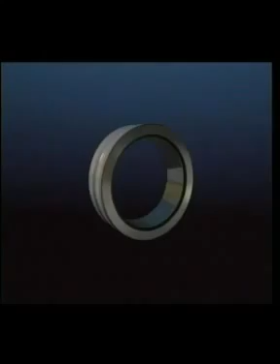The self-aligning ball bearing consists of two rows of balls secured and separated on the inner ring by the cage, and a sphered outer ring raceway.

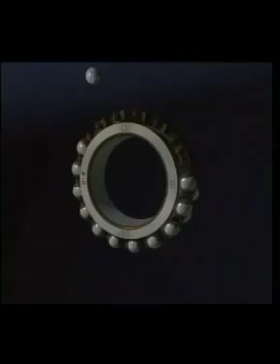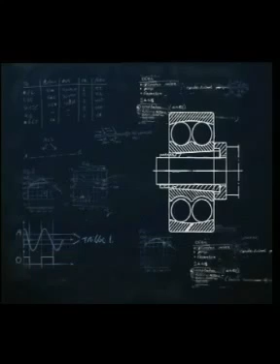There are two types of self-aligning ball bearings: those with a parallel bore and those with a tapered bore. This film concentrates on the tapered bore type because they're mounted and dismounted in a particular way. The parallel bore types are mounted and dismounted with the same procedures as used for deep groove ball bearings with a parallel bore. They're commonly used in applications like mixing, blending and stirring machinery, also in intermediate shaft positions and fan applications, where the ability for self-alignment is important and the loads are relatively light.

For the mounting of the self-aligning ball bearing with tapered bore, SKF supplies a lock nut spanner kit that ensures the correct bearing adjustment is achieved.

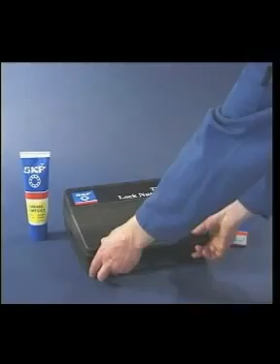Make sure that the work area is kept as clean as possible. Use some light oil on the mating bearing surfaces. Do not remove the bearing from its package until everything is ready for mounting it.

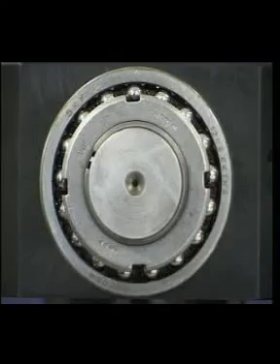In this case, the self-aligning ball bearing is mounted on an adapter sleeve. Put the bearing on the sleeve in its appropriate position. Screw on the lock nut, but without the lock washer. Hand tighten the lock nut by using the lock nut spanner until bearing and sleeve grip the shaft.

Then mark the shaft at the start of the orange adjustment range. Using the handle, turn the lock nut spanner up to the end of the adjustment range. The correct bearing fit will have been achieved. Remove the lock nut and replace the lock washer.

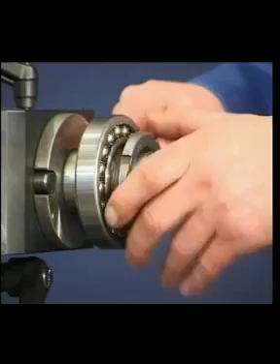By securing the nut back on the sleeve and by bending one of the lock washer tabs into a matching slot in the nut, the correct mounting procedure for self-aligning ball bearings with tapered bore is completed.

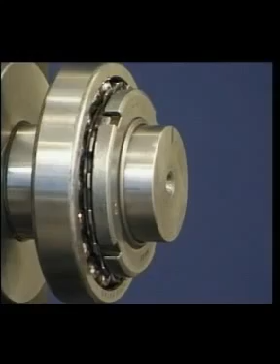To dismount a self-aligning ball bearing, start by unbending the tab of the lock washer and back off the lock nut with a turn.

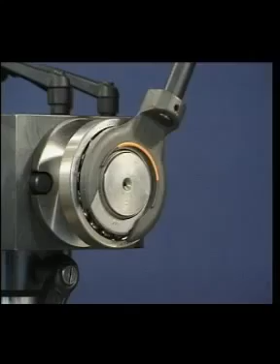Place a suitable steel segment behind the bearing and with some sharp hammer blows, the bearing will be driven off the tapered sleeve, releasing it from the shaft.

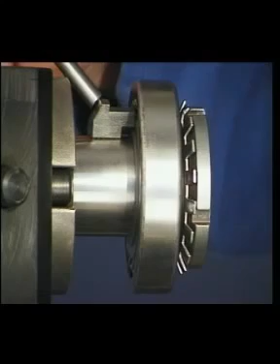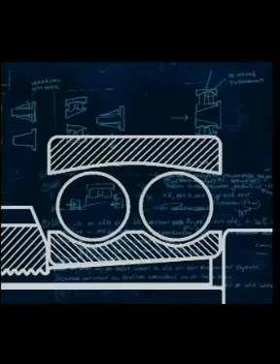The self-aligning ball bearing is supplied with a predetermined amount of radial internal clearance. When driving the bearing up the taper seating, take care not to drive it too far, so removing all of the internal clearance, as this will impair the performance of the bearing and dramatically reduce its life.